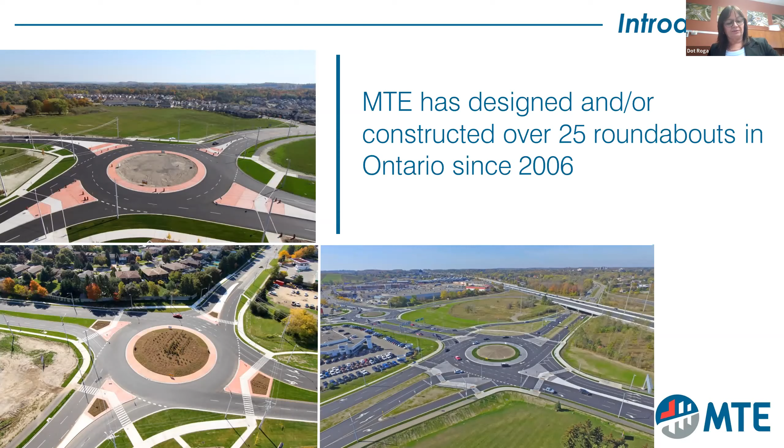The region originally started out with Ourston Roundabouts Canada doing their functional preliminary designs, which MTE then took through final design and construction on the projects we were awarded. Eventually, the region became more confident in our analysis and design skills and has been awarding us projects involving the full gamut, from intersection control study planning through preliminary and final design and construction for roundabouts in the area.

Today, we're going to talk to you about the experiences we've had over the last number of years with the various types of roundabouts, covering the planning perspective, the design perspective, the construction, as well as maintenance.

We have designed and constructed rural single lane roundabouts to primarily improve safety with low volumes, and we've also completed multi-lane roundabouts where traffic capacity improvement as well as safety improvements were required. Those corridors had volumes of over 50,000 vehicles a day.

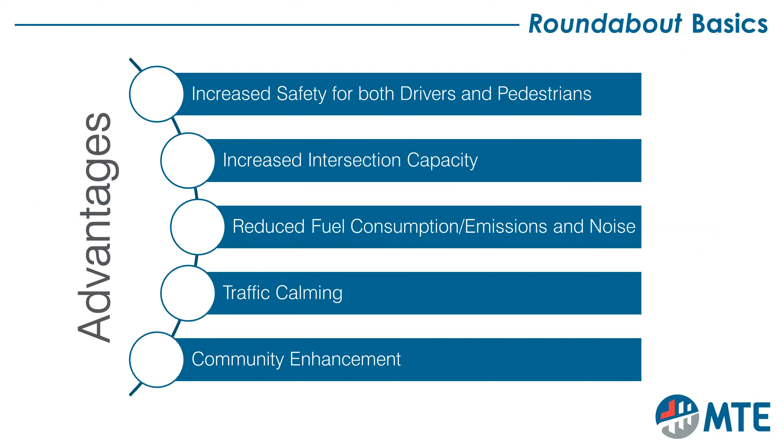So I think we can start off by just talking about the basics of a roundabout. What are the advantages? What do people see as the good points of having a roundabout? Well, there's a lot of increased safety - predominantly, I think the increased safety is paramount. The increased intersection capacity is also a very important factor. And we do see a reduction in fuel consumption, emissions and noise, traffic calming, and community enhancement.

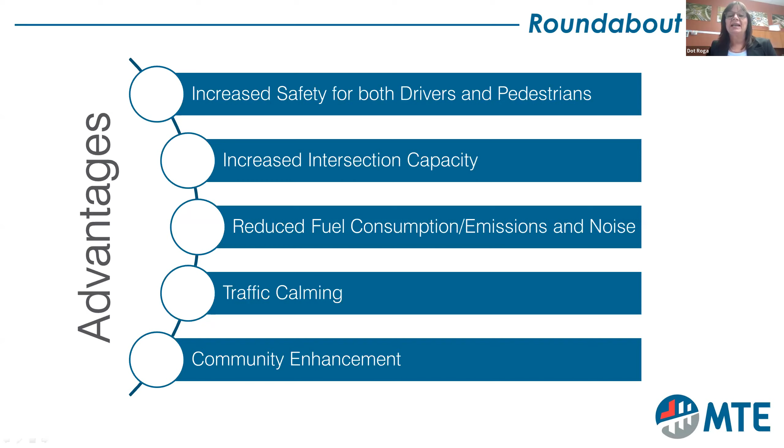Now, along with that, there's always disadvantages, especially in the urban environment. The larger space requirements for these roundabouts pose a problem, and a lot of times the intersections as they're built are built out around them. So buildings are built close to the property line, making it difficult to put these types of intersections in place without full buyouts. That's part of the higher upfront costs - you're looking at mainly property and a lot of costs to manage the utilities that need to be relocated or improved as a result.

One disadvantage we've come across, and it's definitely something you can work with, is public education, where we're in an unfamiliar location. People that aren't used to driving roundabouts need to be taught how to drive them. Although it's very intuitive to us now, it does cause some problems for people because it's a change - they have to make judgments instead of following a red or a green. So they have to warm up to these things and take some time.

Some locations can be very complex, and it just proves to be either too difficult or too costly to put in place. One of the other factors is pedestrians with disabilities. We've yet to come up with a solution that municipalities have bought into for managing pedestrian use, especially with sight impaired disabilities. So that's something that is always being considered, and hopefully we can work towards a better solution for that.

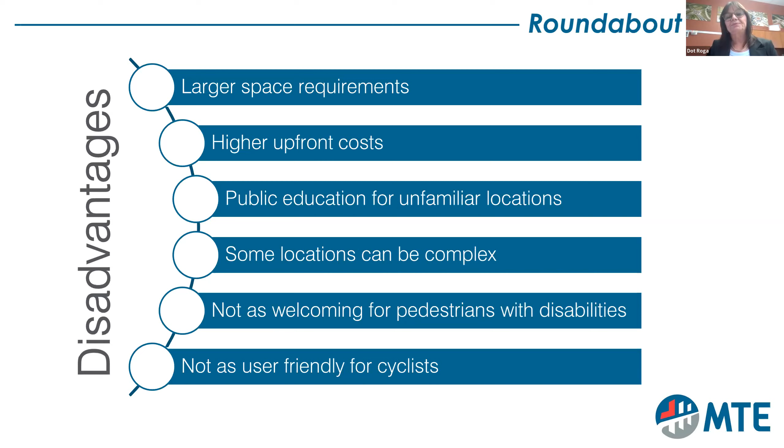Talking about lower accident severity, you have to recognize that one of the biggest concerns we have with standard intersections is the right angle T-bone collision. It's a deadly collision, causing a lot of fatalities on high speed, high volume roads, as well as rural roads where you can't judge speed very well, and you end up getting out into the intersection and being hit at a 90-degree angle.

The other is high speed rear end collisions that are also proving to be deadly. Roundabouts virtually take those two off the books because you're not in a cross situation, you're in a circle. So you're going to get a lot of accidents, but they're generally failure to yield, front and rear quarter panel damage accidents, with very little injury, if any at all.

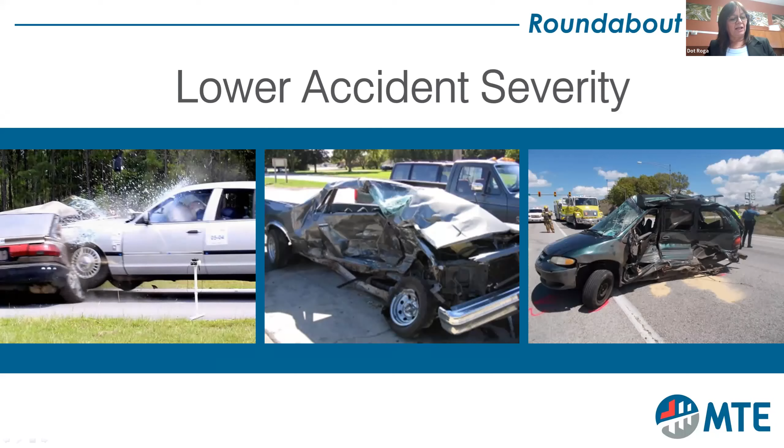So that just gives you an idea of why we choose them.

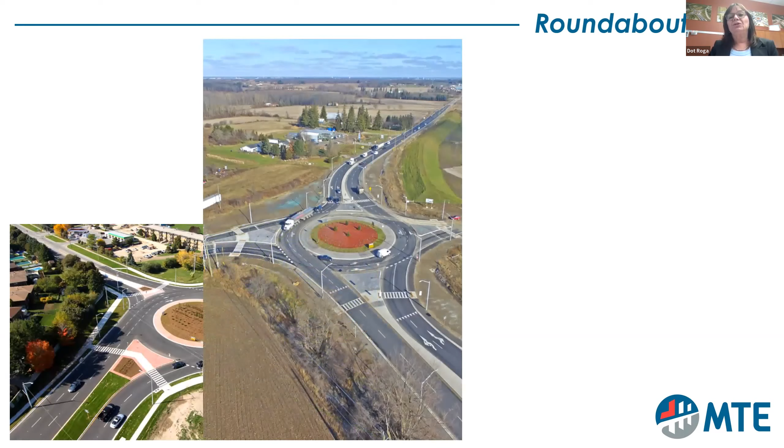And then we can start looking at the different types of roundabouts that we have come across in the last 15 years, and Nathan will bring us through discussing some of these roundabout types. As you can see, we have a wonderful collage of the various ones we've done, which have included single lane, multi-lane, rural, and neighborhood roundabouts, which are generally within a subdivision, and innovative roundabouts where we're trying to solve very intricate problems. So with that, I'll pass the presentation over to Nathan, and he can continue talking about the design.

Thanks, Dot. Since I'm willing to bet most of you, if not all of you, have had some experience with roundabouts, given their growing popularity in the province, for this presentation we're going to focus on the various roundabout types rather than going in depth into all the intricate details of roundabout design.

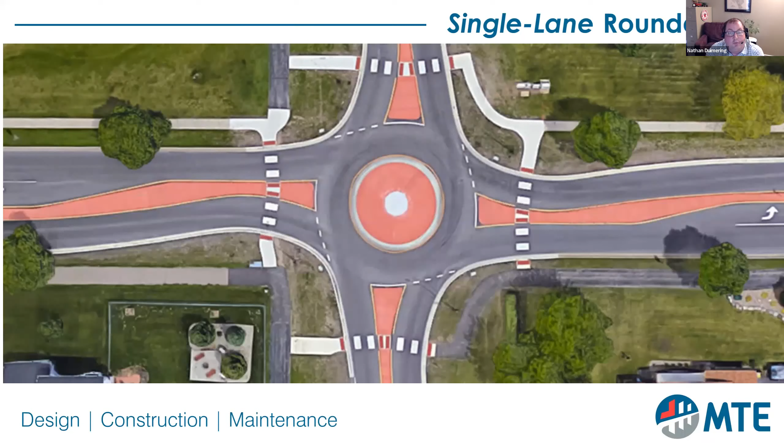Single lane roundabouts are the most common roundabout design that we see. This is due to the fact that in many locations, traffic volumes only dictate the need for a single lane roundabout, and often in those cases they're desired due to their safety performance and traffic calming properties.

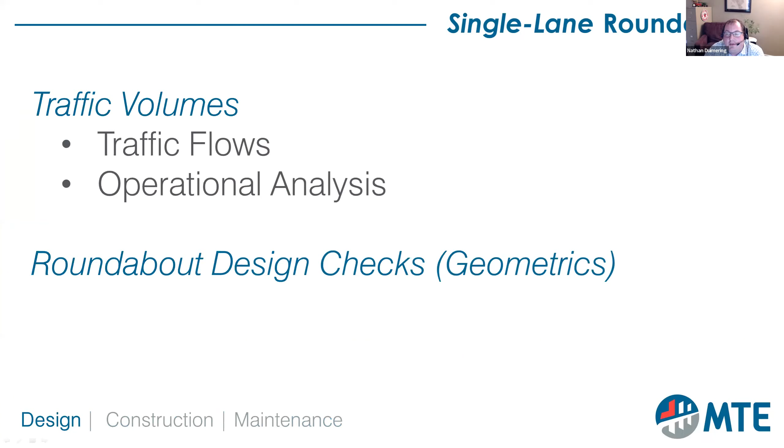There are many different aspects to a roundabout design. I would argue the two key pieces are the traffic volumes and the geometric design, and I'll expand on those.

We start our design by looking at the existing and future traffic volumes and turning movements to verify that a single lane roundabout will properly accommodate the projected volume. We do this by first projecting the roundabout flow sheet that takes the projected peak hour turning flows and evaluates the traffic, looking at entering, circulating, and exiting volumes. This gives us a rough idea if a single lane roundabout is suitable for our location.

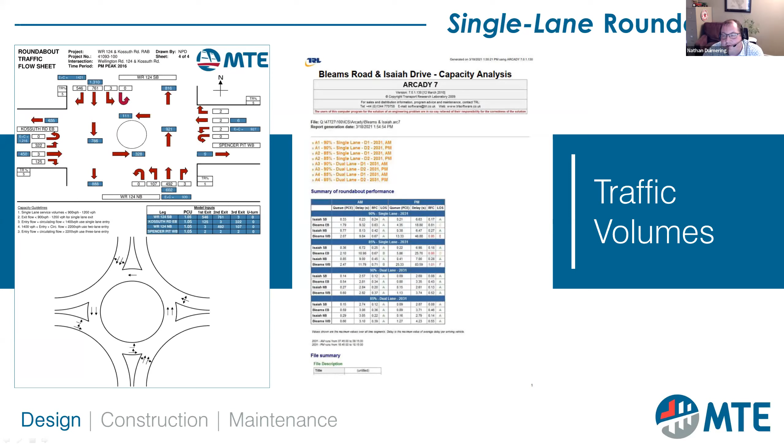A single lane roundabout can handle approximately 1,200 to 1,400 vehicles per hour of combined entry and circulating flow. If the volumes from the flow sheets are borderline, or if the volumes are disproportional to one leg over the other, we'll perform a capacity analysis and verify the projected level of service, to confirm that a single lane is the right solution and that it's going to work as desired when we get out in the field.

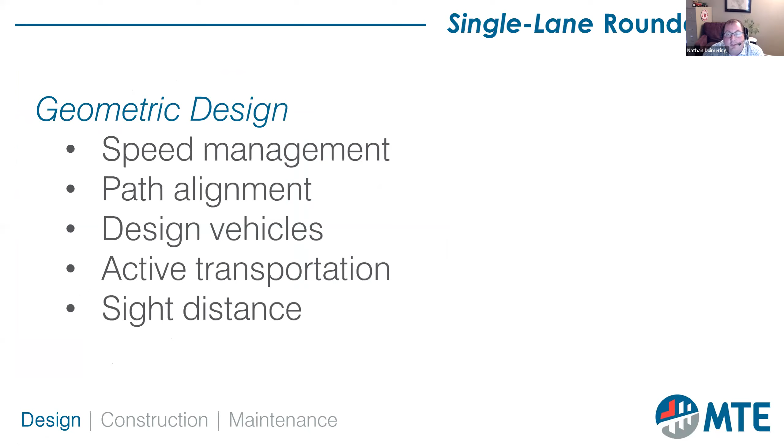For geometric design, the principles that we really abide by are speed management, path alignment, design vehicles, active transportation, and sight distance, amongst a few others.

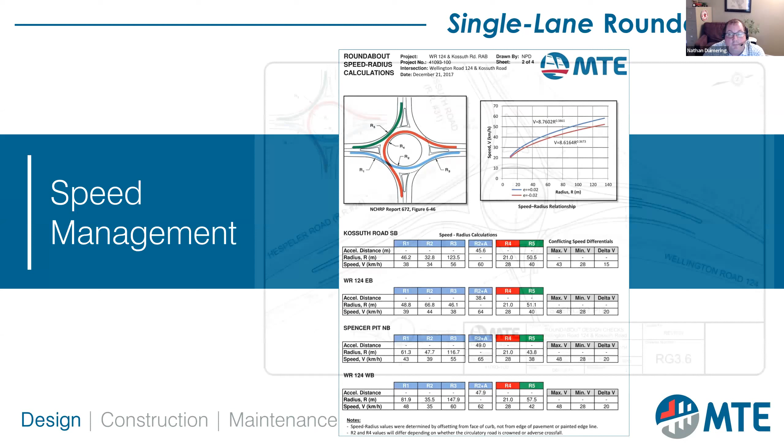In simple single lane roundabouts, speed management and path alignment are often easily controlled and verified using a fastest path analysis. Here you can see an example of a fastest path analysis, which maps out the fastest possible route a car can take through the roundabout—like if it's a race car trying to get through as fast as it can. Using the curve radii along that fastest path, we then translate that to projected speeds.

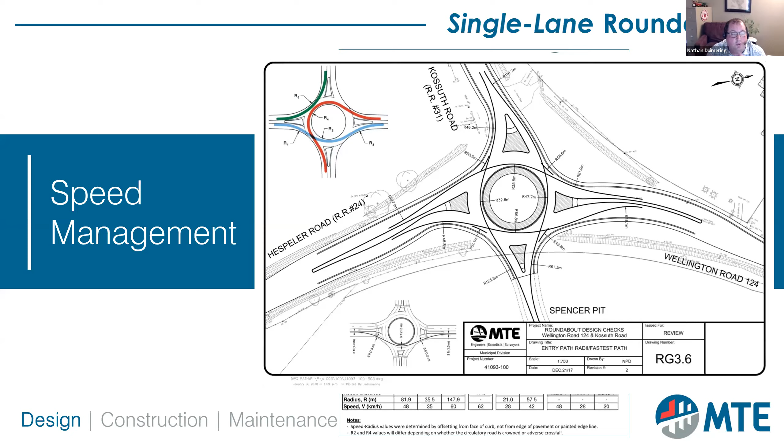Our goal is usually to have entry speeds around 40 kilometers an hour or less, and the differential speed of a car entering versus a car circulating below 20 kilometers an hour. We can tweak that with the geometry to try and get those desired speeds.

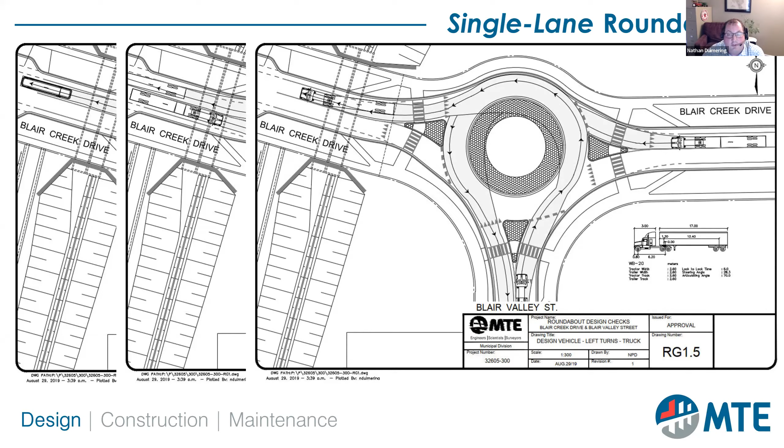Design vehicles are usually municipality dependent. Often we use a city bus being able to maneuver without mounting any curbs for rider comfort, as seen in this example. We'll then use a large transport truck being able to maneuver right turns without mounting curbs, so that we don't end up with any load shifts on hard right turns. And for trucks turning left, they utilize the aid of the central island truck apron. These are just a sample of some of the design details we go into when doing a roundabout design checks package and ensuring we've got the right geometry for this location.

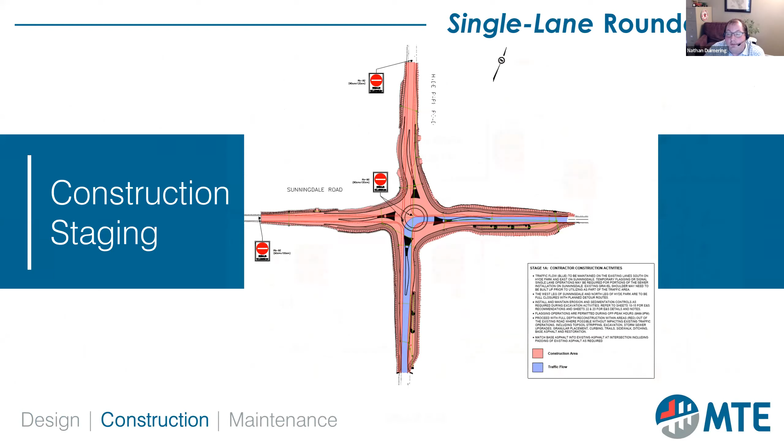So now that we have a design to build, how are we going to build it? One of the more challenging design considerations is construction staging. We start with looking at the scope of work: are there deep sewers or utility relocates that require full closures? What are the detour options? Can we do a full closure, or must local traffic be maintained? All of these factors play into a detailed construction staging design. As can be expected, the less traffic we can have within the construction zone, the more efficient the project will run.

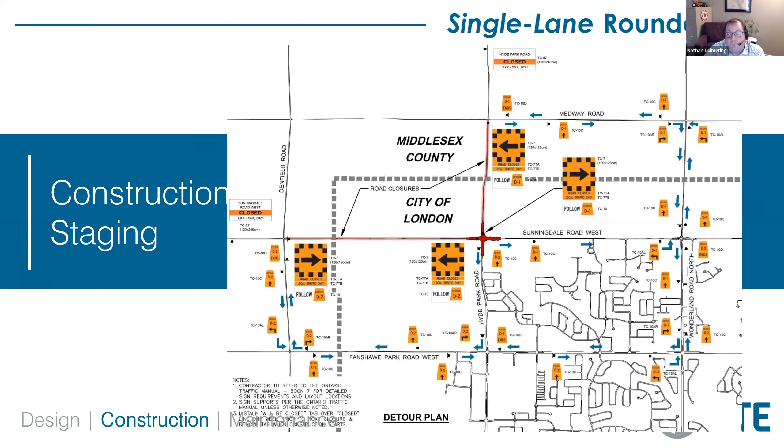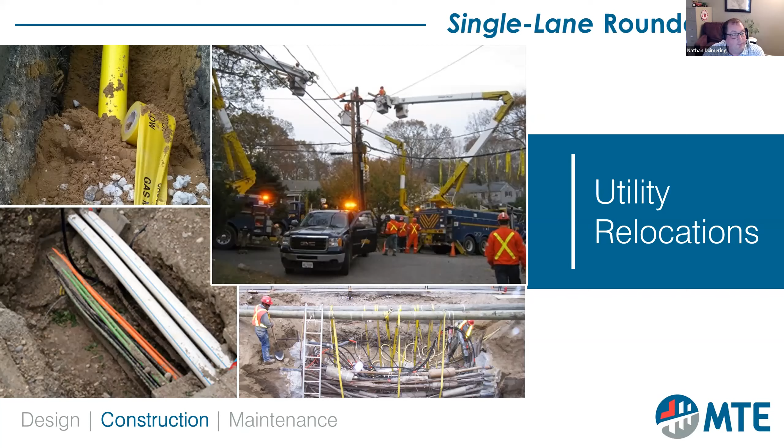It's very important, and I can't highlight this enough, to identify as many utility conflicts prior to construction as possible. Last minute utility coordination can be extremely challenging and in some cases a bit of a nightmare. If there are any current concerns regarding utilities, we highly recommend doing daylighting to verify location and depths, and arranging any potential relocations as far in advance of construction as possible. This is a very important part of the construction.

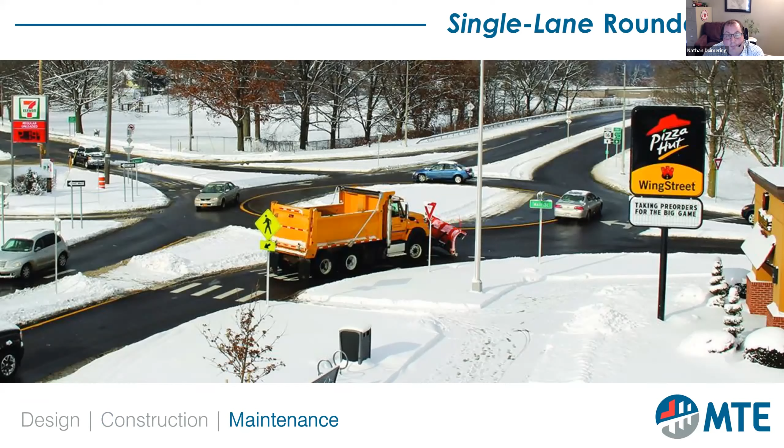As far as maintenance goes, winter maintenance is relatively easy. Plow operators can circulate the roundabout for cleaning operations. They can mount the truck apron to get the plow in the right position. We haven't heard too many complaints from maintenance sides regarding winter maintenance. One design feature we do recommend is using tapered bullnose transitions. This allows the plow to mount the curb if they get a little too close to splitter islands, rather than causing damage to equipment as well as the curb itself.

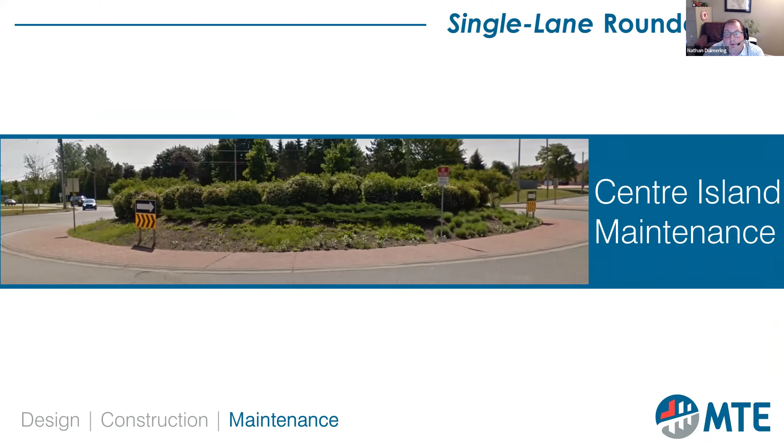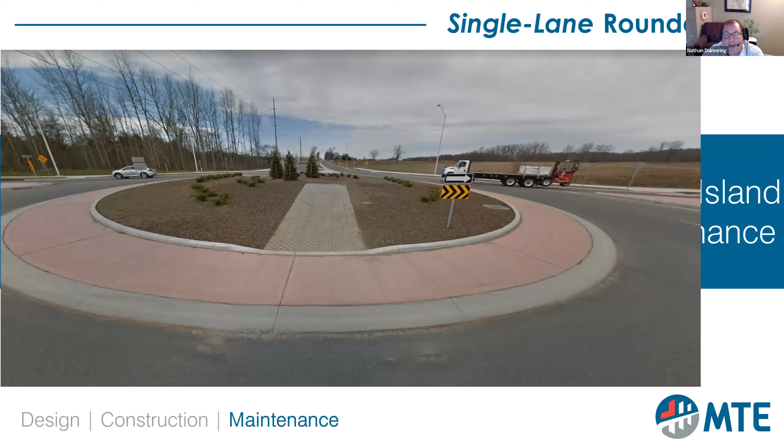Another concern for municipalities is central island maintenance. We recommend the use of a wider 4-meter truck apron, which gives room for a maintenance vehicle to park on the central island to perform maintenance. We've had some municipalities choose to utilize turf stone pavers for parking maintenance vehicles, but this has an issue in that it requires the vehicles to back into circulating traffic when exiting. So we highly recommend using a wider truck apron. With a 4-meter apron, workers can park on the central island, exit their vehicles, and perform any maintenance without having to go into circulating traffic. We've had some municipalities also install water taps in the central island, though this has the potential to become a maintenance issue in and of itself.

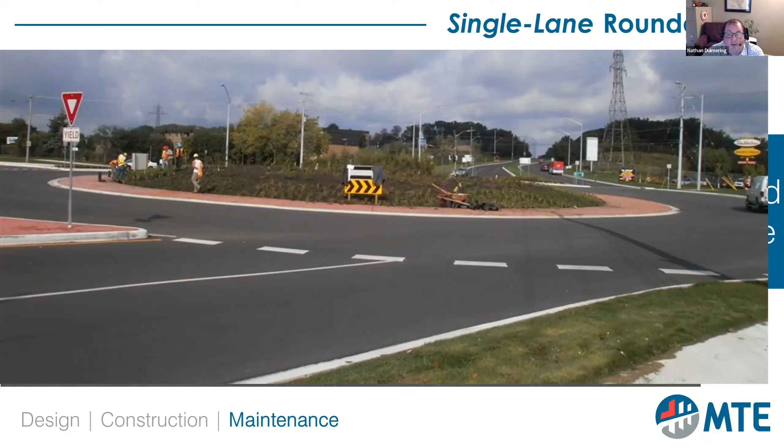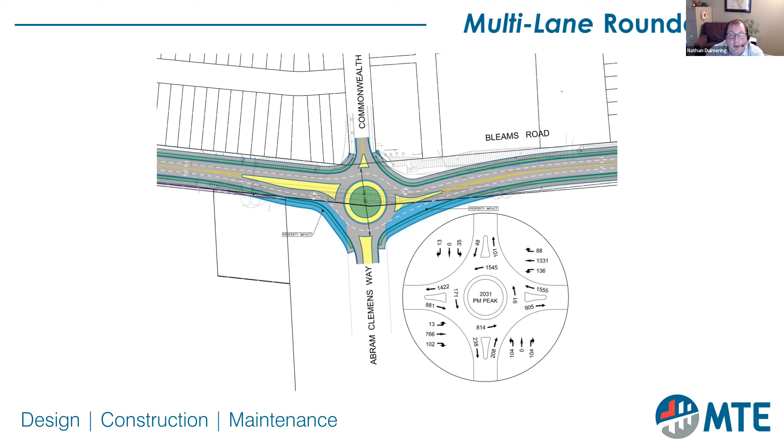Going on to multi-lanes, as in the previous example with single lanes, when we look at traffic volumes and find they're borderline, we perform a capacity analysis and find that a single lane may not handle the projected volumes we anticipate. Then we start looking at multi-lane roundabout options. Various configurations can exist depending on site conditions. For example, we can have a dual lane circulatory for the entire roundabout, or as in the example shown here, dual lanes in the east-west direction and single in the north-south. We can do quite a variety of lane designations.

We can incorporate dedicated left turns, or in this example, right turn bypasses. All of this comes at a cost: more complexity for the driver, more challenges to get speed management, and larger crossings for active transportation users. We found that over the years, when comparing a single lane versus a double lane or triple lane roundabout, the complexity for drivers increases exponentially, with drivers needing to figure out which lane to be in.

We don't feel it's that complicated. When we go to public meetings, we try to reiterate to the public that approaching a roundabout is the same as a signalized intersection: if you're turning right, stay in the right lane; if you're turning left, go to the left lane. But try as we might, there are always going to be those who violate lane designations. So there are usually higher accident rates at multi-lane roundabouts versus single lane. But as mentioned at the beginning of the presentation, their severity is much less than that of a signalized intersection, and in many cases are property damage only collisions.

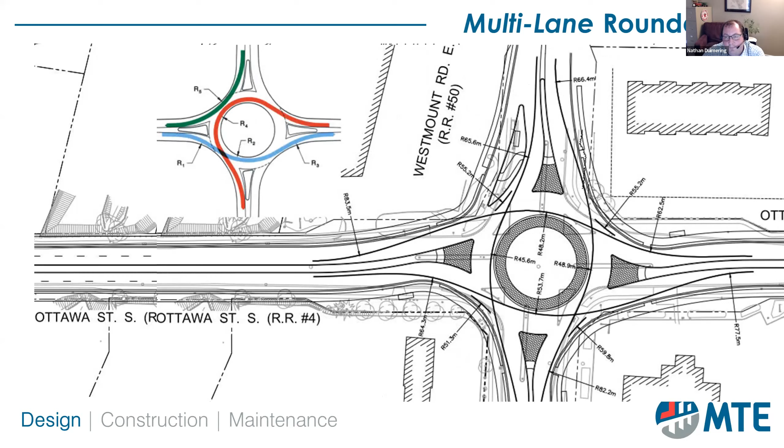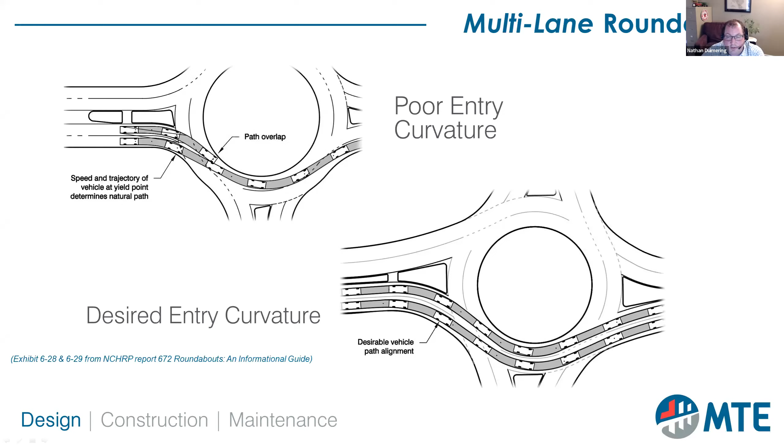For construction with larger roundabouts, there's often more land area to work with when preparing staging plans, which lends itself to more flexibility for maintaining traffic. That said, the reason we're installing a multi-lane roundabout is due to existing traffic volumes, so there will inevitably be more significant construction-related traffic impacts. If it's at all possible to close all or at least some of the legs to traffic, that will help with construction operations and efficiency.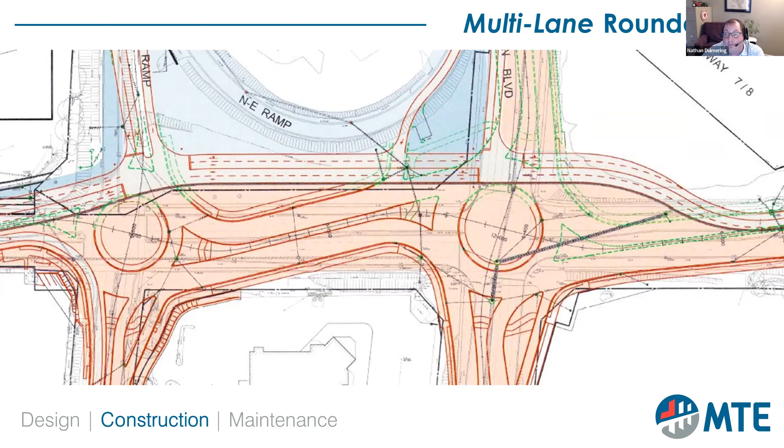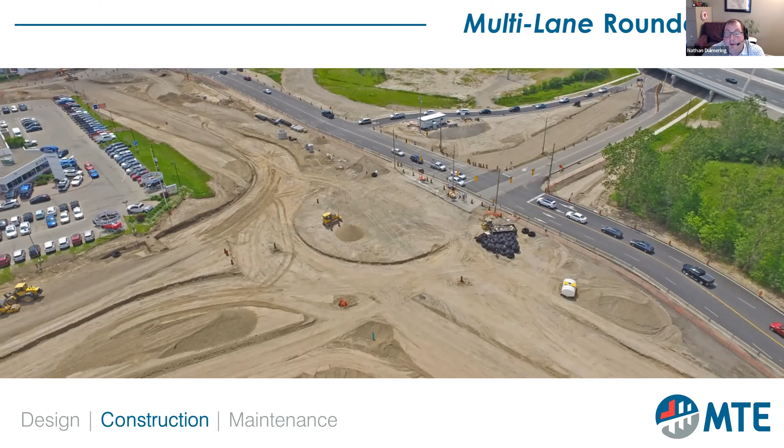Take the example shown here. We were planning to construct 2 large roundabouts, and the municipality wanted both completed in one construction year on a roadway where one of the intersections conveyed 60,000 vehicles per day under normal volumes. They wanted it open prior to Oktoberfest, as one of the larger fest halls was just down the road. To accomplish this, they allowed the closure of one of the region's larger arterial roads, allowing us to construct a temporary bypass road, which let much of the roundabout area be built while maintaining some local traffic.

As with a single lane roundabout, winter operations for multi-lanes are quite similar, except larger roundabouts require multiple passes, which may require more coordinated operations effort.

I'd like to hand it off to Alec, who's going to talk to you about rural roundabouts.

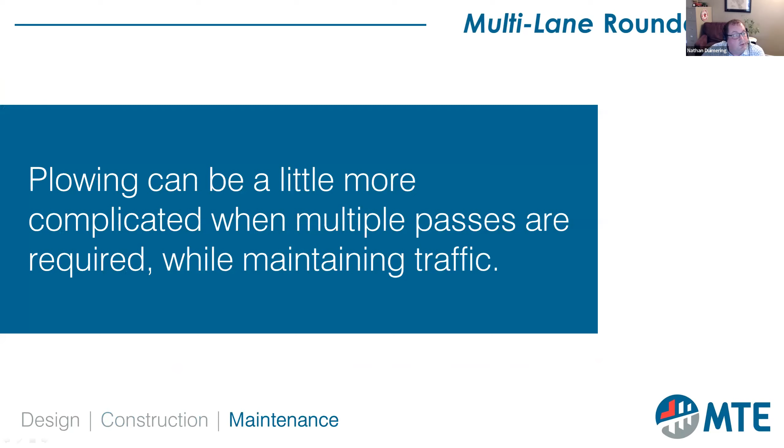One of the reasons I got very interested in roundabouts, and especially rural roundabouts, is that when I first started my career as a co-op student, I was doing work for a municipality at a traffic signal department. One day we got a call saying there was a collision and we had to go inspect the signals to see if they needed repair. I thought nothing of it and went out there. It turned out to be a T-bone case where the victim, unfortunately, was a mother of 3 who passed away. Ever since that day, I vowed to do my best to make everything as safe as possible whenever I do a design, so roundabouts were naturally a good fit for me.

So the first thing I wanted to go through, not to bring everyone down, so I'll try to bring everyone back up, is to give a couple of examples of rural roundabouts we've designed over the years. The first one is Kossuth Road at Wellington Road 124 in Wellington County.

As you can see, the southeast leg there is for future development, so it was quite an interesting design phase to take into account, working with the other consultant doing the site over there to ensure the roundabout connects to their road and everything works out.

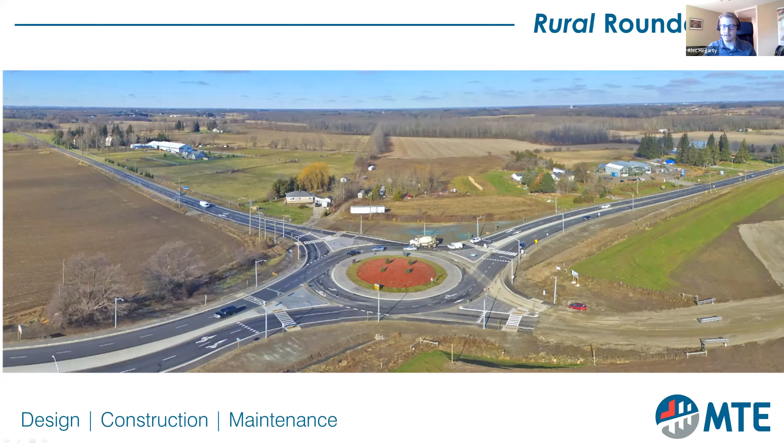The next is Ament Line and Hergott Road in Wellesley. The need for this roundabout began when there were 2 separate fatal accidents at the intersection. MTE was then brought in to design a roundabout that would significantly improve sightlines and reduce drivers' speed entering the intersection, in order to reduce the severity of these collisions.

And finally, the one I'm working on, Grey Road 3 and Grey Road 4 in Grey County. It's actually quite an interesting project as well. We were given very tight property requirements in the Northwest, so we couldn't take any property from there. We needed to shift the central location of the roundabout to fit within our proposed limits, and at the same time keep running iterations that would allow us to get the appropriate speeds throughout the movement without interfering with the Northwest corner at all.

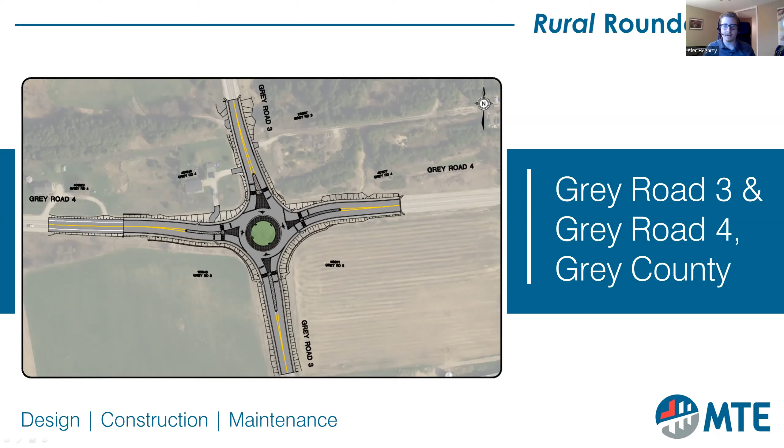So, quite a fun project to work on.

When it comes to a rural roundabout, the main concern is your collisions and their severity. Roundabouts are normally a good solution to a capacity and flow issue, but in a rural situation, that's really not your biggest concern. The biggest concern is going to be collisions, usually caused by high speeds and poor sight lines. Traditionally these are right angle or head-on collisions with catastrophic results. So, as mentioned earlier, we bring in roundabouts because they primarily only produce property damage.

Now just to give a brief overview of speeds - the biggest concern at these rural intersections is the speed cars are traveling, which is even more vital at a two-way stop controlled intersection. In these situations, there are special guidelines in order to get your approach speeds lower, and you have to produce proper radii to slow the cars down to a reasonable speed.

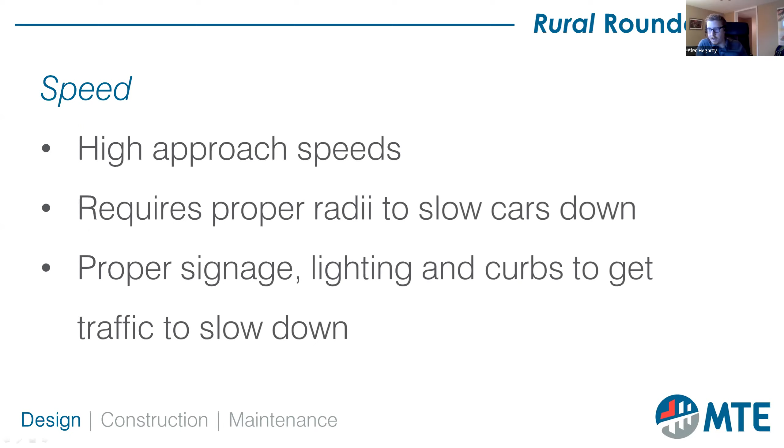Other things that help in these situations is proper signage. Usually in rural locations you have higher speeds, so you have bigger signs. You need to ensure proper lighting and curbing for traffic calming, and usually we have these go all the way out to the end of the splitter islands, just to really get cars to slow down.

Speaking a little more on crash severity - this can be argued as the biggest reason to install a roundabout at a rural location. As mentioned earlier, the lack of gap judging and poor sight lines traditionally lead to right angle and head-on collisions, known to cause fatalities or severe injury. With roundabouts, some people won't understand how to use them correctly - that's just how life works, unfortunately. But again, their mistakes are only going to lead to side swipes, rear endings, property damage stuff.

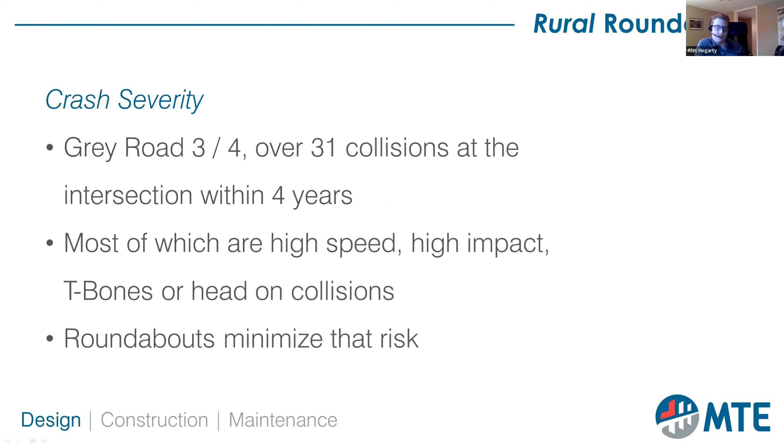The better the roundabout is designed, the slower both cars will be traveling throughout it, which will minimize the impact of these collisions even further.

The final thing we worry about when designing them are heavy vehicles. At a rural location, we've seen a lot of fun vehicles that can traverse them, ranging from a horse and buggy out in the Waterloo area - if you've been out here, there's quite a few - all the way to giant farm combines. So in a rural roundabout, we account for this by trying to produce a larger diameter circle that will allow trucks, combines, you name it, to travel through with no issue.

And again, as mentioned earlier, we like to widen the inner island so that if a maintenance crew needs to go out there, they can park the car on the central island, open their door, and they don't need to impact circulating traffic.

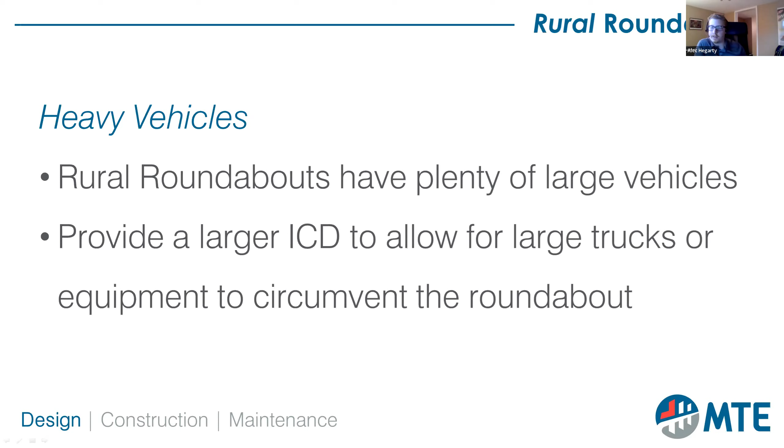In terms of construction, when it comes to building a rural roundabout, much like any rural road, you don't really run into too many utility conflicts. Of course you'll have a few, but it's not like dealing with buildings on every corner, so you get a little more space to design it. The biggest issue you usually face is the staging.

In an urban area there's plenty of opportunity for detour - you can close a stretch down, and if people take a kilometer or 500-meter detour, they'll complain, but it won't be as loud as in a rural location where your connecting road might be 2 kilometers away, give or take. So you can't really shut down a road - you have to keep traffic moving in all directions.

Usually it involves the use of night work, flagging operations, and temporary asphalt to move people over. We actually have a great contract administrator who's constructed so many roundabouts that I'm just glad he works with us, because then I can ask him questions whenever I get a little stuck.

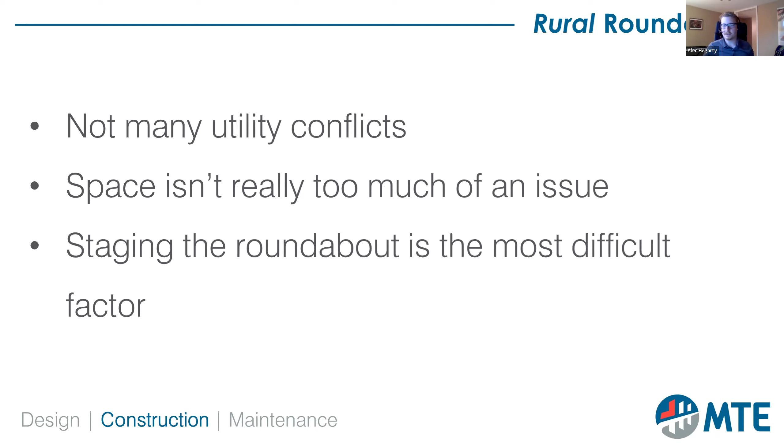So the benefit of having a roundabout in a rural location is the maintenance. The roundabouts are fully operational, so if a power outage occurs, you don't have to worry about the traffic signals going out and sending a maintenance crew out into the middle of nowhere to get it done.

Snow removal vehicles, like we said before, we designed for them to be able to not only traverse the roundabout, but exit and enter. They don't have to worry about the curbs too much; we put the little taper in. Usually a more experienced snowplow driver will know how to operate it, but say a newer one, it takes a couple passes and then they'll get it right away once it's part of their route.

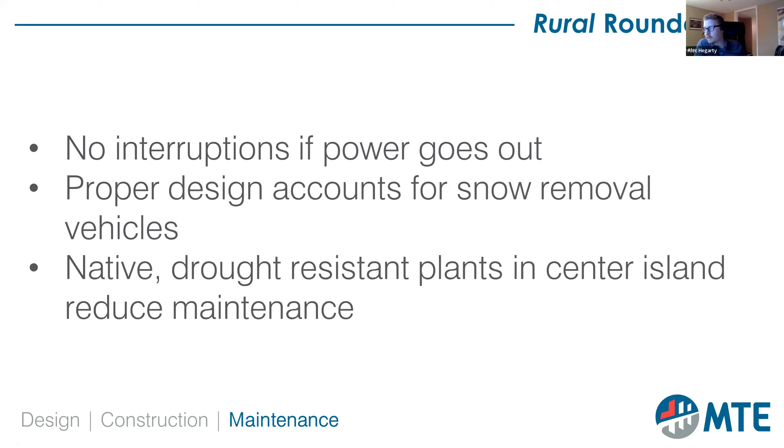And the inner island, especially when it comes to the plant work in there, which sometimes we do, sometimes we have to ship that off to a landscape architect. It usually depends on the municipality doing it. But when it's up to us, we like to put in native drought resistant plants, which requires very few maintenance crews. Native drought resistant plants will survive not only in the climate, but also, you give them a big water when you plant them, and usually they can survive off of what nature provides them.

And finally, just to give you a little bit of a number here: the average rural roundabout single lane is primarily going to cost about $1.1 million, and that's going to include your design and construction costs. Of course, this number is going to change based on multi-lane construction, how intense the storm design is, and if a lot of utility relocations are required.

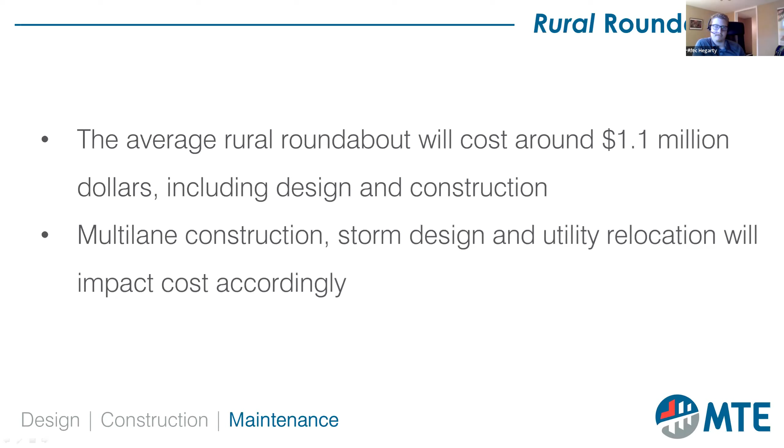And I believe that brings us back to Nathan.

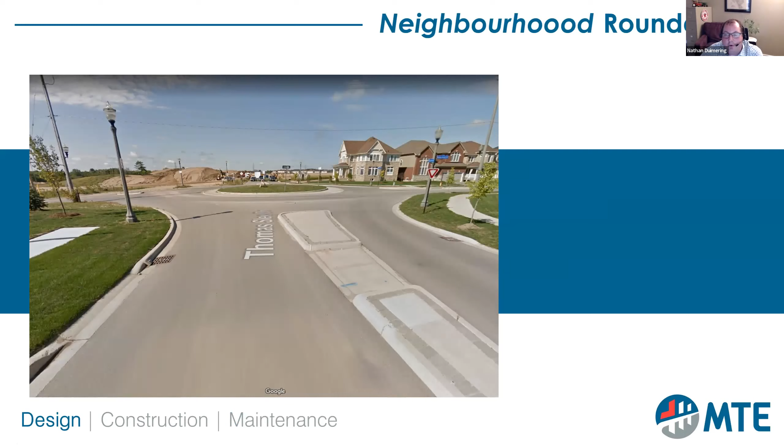Thanks, Alec. I'm just going to touch a little bit here on neighborhood roundabouts. Neighborhood roundabouts can take many forms, from small-scale single-lane roundabouts, such as this one here, down to mini roundabouts, which can take the place of a four-way stop intersection. They can take on a minimalist style or have grand aesthetics with public art. For these roundabouts, volume is rarely the issue, but more we're looking for traffic calming and aesthetics. These designs vary depending on the land availability and the vision for the surrounding area.

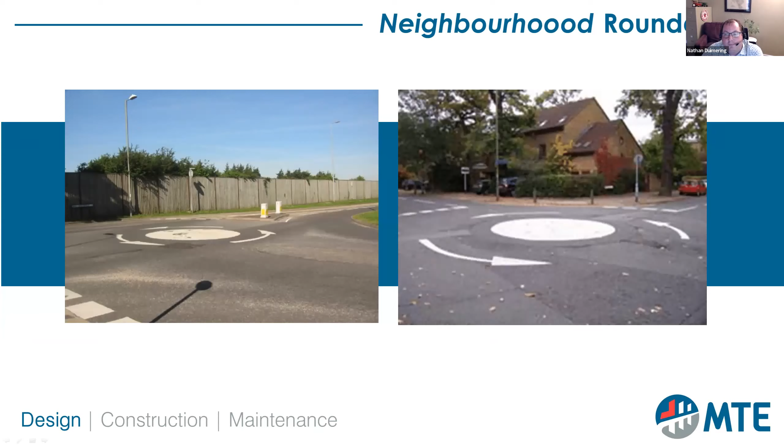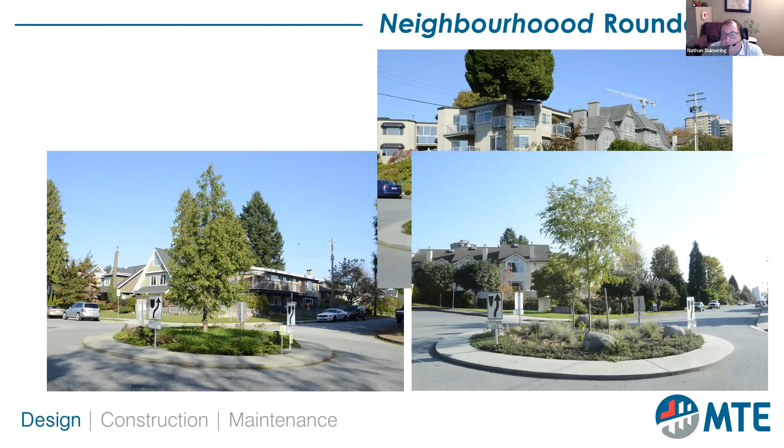For example, in the city of Vancouver, they were looking for traffic calming features and installed a number of small circulatories to replace four-way intersections, and worked with neighboring residents and organizations to maintain the plantings within them. So it's just one option to try and provide a bit of traffic calming and a different aesthetic to a neighborhood.

In the city of Kitchener, they installed a mini roundabout to replace a three-way stop and utilized a fully mountable central island to achieve slower speeds, smoother traffic flow, while also allowing buses and trucks the ability to maneuver over the island if they desire.

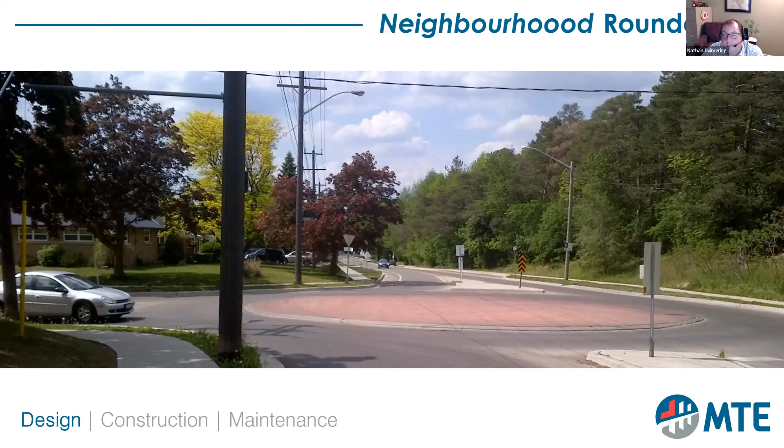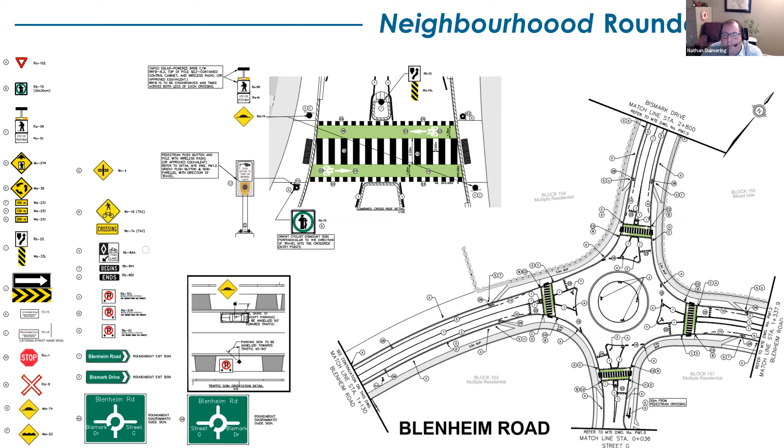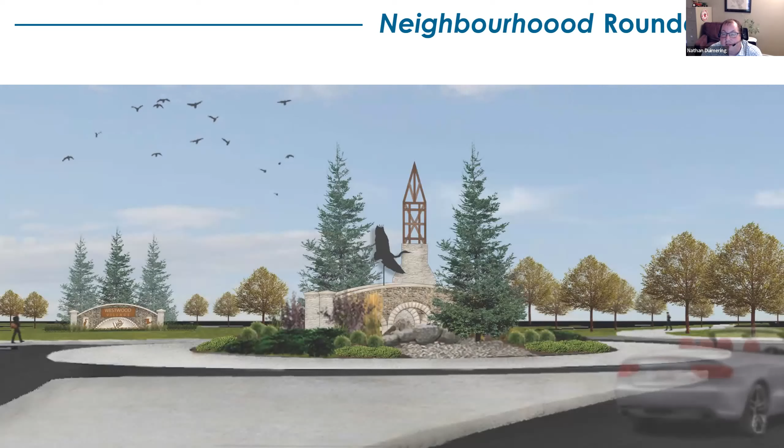We've been working with a local developer for a subdivision, and they took the vision of using roundabouts as a neighborhood focal point. They introduced raised crossings with rapid flashing beacons. They did this in consultation with the town, the city of Cambridge, actually, as a bit of a pilot, to see how this works to have these raised crossings at a roundabout. That same developer in that roundabout is going to be doing quite an elaborate central island landscape as an entrance feature to the subdivision. So there's a wide variety of options and ideas that can be applied with neighborhood roundabouts.

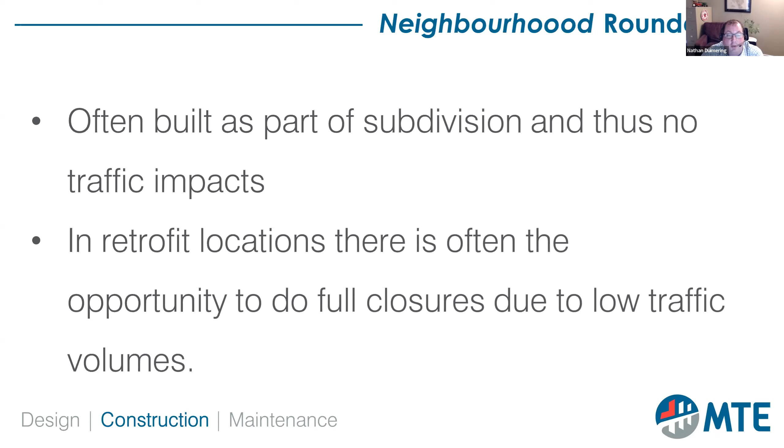Often these roundabouts are built as part of a subdivision, and in those cases, obviously, traffic's a non-issue. In cases where they are being retrofitted, if they're in local areas, often there's a lot of alternative roads that can be used, and so full closures are easily achieved, which helps expedite the construction. Depending how elaborate the construction is, often they don't take actually that much time compared to a traditional full single lane roundabout.

One thing that we want to highlight for maintenance, it's important that municipalities understand what it takes to do the maintenance for local roundabouts. We have a neighborhood roundabout that we're working on that's actually under construction right now, and unfortunately, the operations department wasn't consulted during the design process. During construction, when they saw the design, they acknowledged that they didn't have the right plowing equipment to clear it. In this design, they were proposing on the one leg, which was going to have quite a high speed approach, that they were going to put in raised pedestrian crossings. Unfortunately, they felt they didn't have the equipment to plow that properly.

So now we're working on adding a bit of an entrance curvature so that we can get cars slowed down before that pedestrian crossing into that roundabout. So I just wanted to highlight that it's important that when you're putting in those neighborhood roundabouts that we look at all the different maintenance requirements. Now I'd like to hand the presentation back to Dot, who's going to look at a few unique roundabout applications.

Thanks, Nathan. The first one I want to show you is a rural intersection in North Waterloo called Crowsfoot Corners, and you can see why. The main through road is quite steep, and the two roads coming out to it come down grade to it. So there's been quite a few issues with sight lines and a lot of accidents.

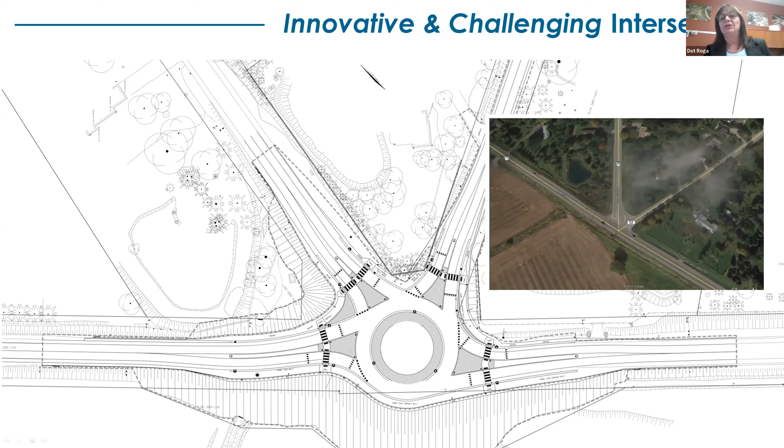But what we did instead was design the grade change along here and reprofile the road. So we cut about 1 meter out of the road. In that way we have not only the ability to use that material, but it also improved the sight lines for all the legs coming into it. This project is currently on hold with the region right now, and in the interim, they've put in signals just to manage the accidents until they proceed with this design again.

And this one was a pilot project that the city of Kitchener asked us to assist them with. This was an existing roundabout that we had constructed several years ago, Huron Road and Strasburg Road in Kitchener. In the top right of the intersection is a high school, and at the south, the Strasburg Road South was poised for major development. So we were looking at cyclists and pedestrians as a priority. This is a modified roundabout, adding a cycle path around the center of the roundabout.

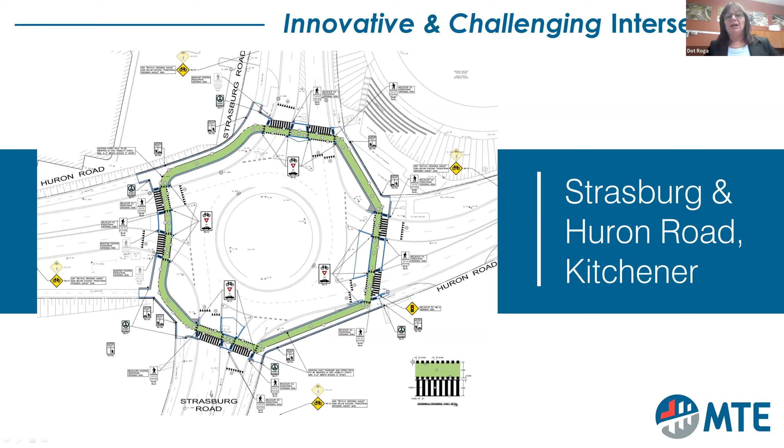So it's a challenge. It's another way that we look at the innovation that can be applied to intersections, and depending on the municipality and how they want to proceed, you can solve a lot of problems with these roundabouts. So I think that concludes our presentation, and we've got plenty of time for some questions and answers.

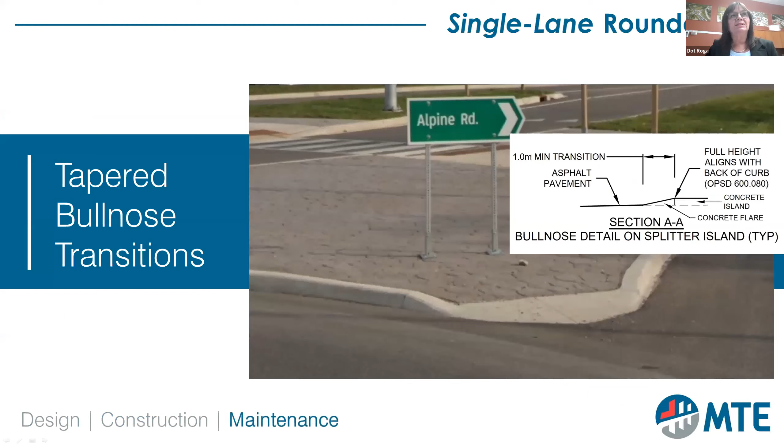Is there a minimum distance between two multi-lane roundabouts to ensure cars have enough time to change lanes between them, like at Ottawa and Homer Watson in Kitchener? We had about 110 meters between those two roundabouts, Nathan. Yeah, it was very tight. That project was more complicated because we have highway ramps coming on and off at either end of this double roundabout. There was some discussion and modeling done about how much time it would take to get from one lane to the other, and we managed it fine with the 110 meters. I don't know if there's a published minimum though.

For that project, since we anticipated quite a bit of confusion, we did a lot of overhead signage to give drivers as much advance notice as possible about where they were going. Because of the on-ramps, even approaching the first roundabout, signs say stay in this lane if you want the next ramp access. So we really focused on signage for that.

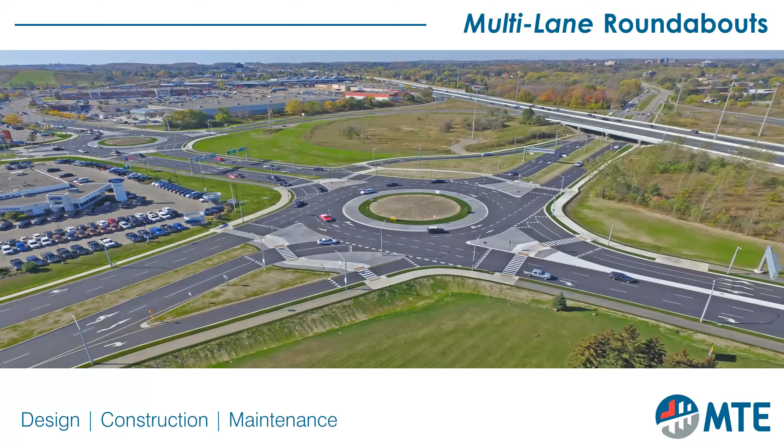Has there been any application of rumble bars prior to approaching a roundabout to further enhance the message to slow down? Not that I'm aware of - I haven't seen it. One thing that might come online more is the raised pedestrian crossing, if they manage the drainage and have the right maintenance equipment in place. I think they've stopped using rumble strips as a rule in most places, and I can't tell you why, but I haven't seen it presented as an option yet. Some of our clients are getting rid of rumble strips because of noise complaints from local residents, so I haven't seen it applied for a roundabout.

As we get more roundabouts constructed and more experience with them, have there been any shifts in design not yet reflected in current guidelines? One tweak we made early on was moving pedestrian crossings further back from the circle so we could accommodate a 12-meter section between the crossing and the circle, allowing two cars in queue without backing up into the roundabout while pedestrians cross. It started as 6 meters and now we've gone to 12 meters. This is an ever-evolving design process because we're constantly presented with different obstacles or concerns, and with the help of our clients, we try to keep up with the changes.

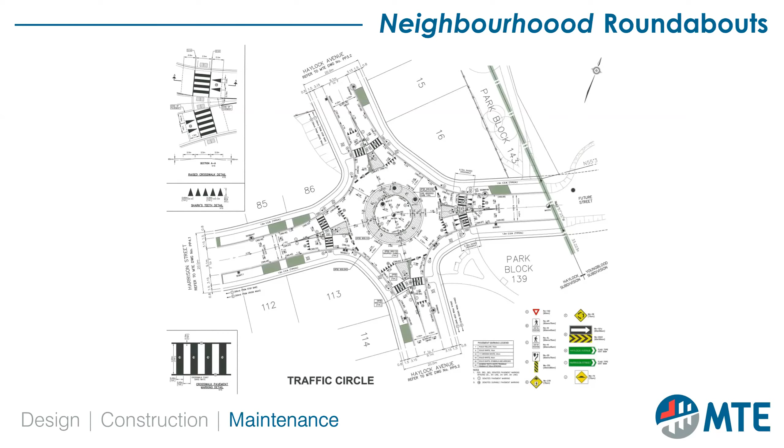As noted in the presentation, utility relocations are not a huge obstacle in rural roundabouts. In more congested urban environments, do the designs include designated utility corridors for relocations, or are utilities relocated case-by-case? That goes back to having Bell and Gas relocate out of the circle, so we don't designate a corridor for them. It's case-by-case. We have a project coming up, in the middle of design right now, where there's a large Bell structure under the road. Instead of making them rip it all up and realign everything, we're likely going to put in new conduit around the intersection. When it does fail, they can go into that new conduit we've placed on their behalf, so we don't have that conflict down the road. As a rule, not a dedicated corridor, case by case.

The Transportation Association of Canada has released new design guidelines for roundabouts. Is there a Canadian course available for designers to learn about roundabout design? There is. The Ontario Good Roads Association puts one on. I believe, though it's been a while since they've had one with COVID, there were a couple of gentlemen from the region of Waterloo teaching that. But yes, there is some out there.